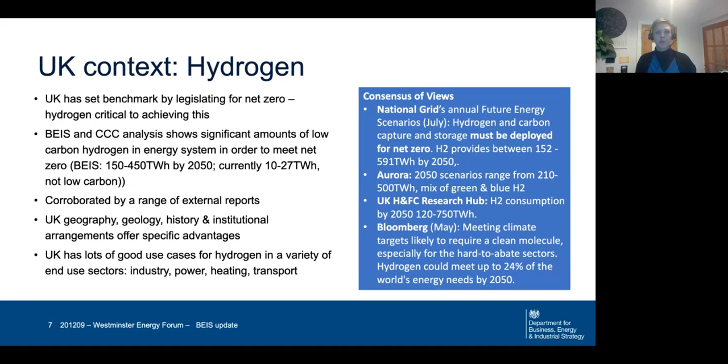Moving on to the next slide. I just wanted to talk about hydrogen in the government's 10-point plan for a green industrial revolution. This, you will have seen, was announced by the Prime Minister in November of last year, I think it was now. And in that, we set out an ambition to work with industry to have 5 gigawatts of low carbon production capacity for use across the economy by 2030.

And we're looking to get to kind of 1 gigawatt by 2025. So that sets out that we are looking for that scale up at this point. We were lucky enough to get some capital co-investment funding of 240 million out to 24-25 for a net zero hydrogen fund. That is for deployment. I'll talk a bit more about some of this later.

It confirmed that we're going to publish the hydrogen strategy. It talked about the need to provide ongoing revenue support for hydrogen production. It talked about moving forward with our hydrogen for heating investigations to villages and towns across the decade, and it confirmed that hydrogen would be a priority area for the Net Zero Innovation Fund.

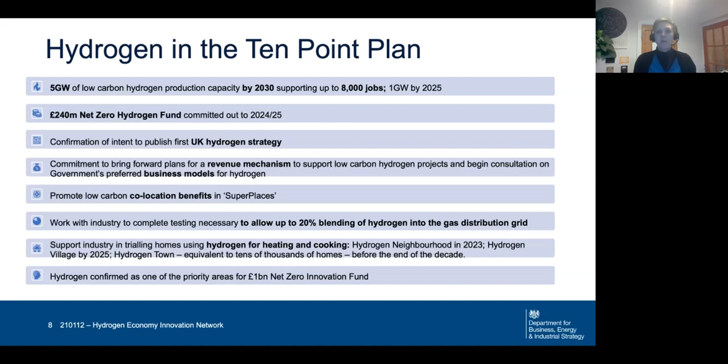Moving on to the next slide. Back in September now, the former Secretary of State, Alok Sharma, committed to publish a UK hydrogen strategy. And we've confirmed that in the 10-point plan and in the energy white paper. That will be a whole system strategy.

It will look at supply through to demand across the whole value chain. It will talk about why hydrogen makes sense in the UK context. We want that to be a whole UK view. We know that in each of the nations, work is ongoing to develop their own hydrogen plans, but we want to be able to showcase the whole of the UK in a UK strategy.

The focus will largely be on the action that's required in the 2020s to meet that 2030 ambition, but we want to be aware of where we need to lay the groundwork for the ramp up beyond 2030, which will need to be pretty steep. One thing we think we have an advantage of is because we are at the early stages of developing the policy and strategy for hydrogen, we can make sure that we're building in a focus on the economic benefits from the very beginning.

We want to be clear on the role of various actors in this, because it's not something that just government can do. Government at all levels needs to be involved. There's a role for the R&D and innovation community, industry, regulators, and a number of different players.

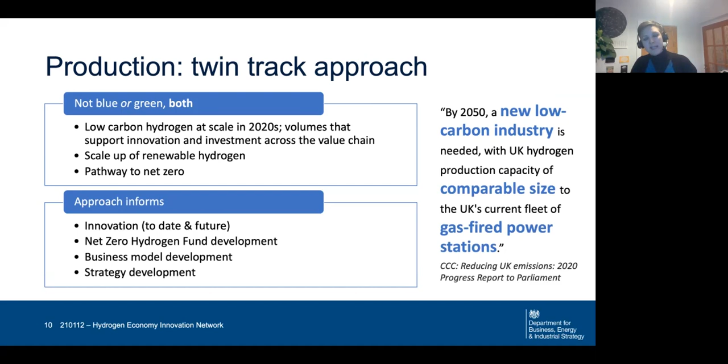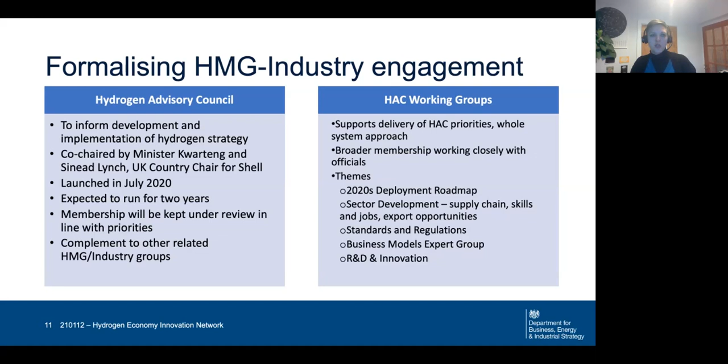There's a CCS infrastructure fund of £1 billion out to 24-25, which will enable some of the blue hydrogen production I was talking about earlier, but also we'll see under the Net Zero Hydrogen Fund the deployment of green hydrogen. Within that as well, the BEIS Net Zero Innovation Fund, successor to the Energy Innovation Fund, has a £1 billion budget, and as confirmed in the 10-point plan, will continue to support hydrogen, with details of the competitions under that fund coming out in the coming weeks and months.

One thing I'm very keen to do with the Hydrogen Advisory Council R&D and Innovation group is get a much better sense of what the funding landscape looks like, so we can support everyone by helping people be aware of the funds available and how they fit together - because sometimes that can be quite complex, what the handoff point is between certain types of funds funding things at certain TRL levels, and where those projects would get picked up later on.

Hopefully that's something we will be able to talk about a bit more in the strategy when that comes out early this year. I can't believe it's this year now.

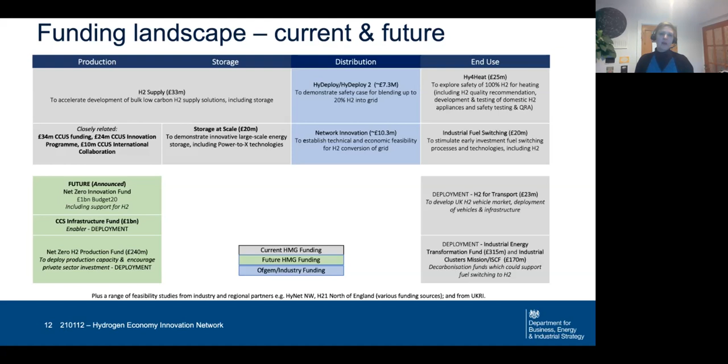Finally, just to talk about next steps. The HAC working groups I mentioned are getting underway. We've got one today on the roadmap to 2030, and the R&D and innovation one, getting that staffed up and in place is certainly a priority. We'll be engaging on the design of the various funds that come out, not just the Net Zero Hydrogen Fund, but we'll be working alongside our innovation colleagues on the priorities for the innovation funding, and also the other deployment funds.

We'll be working on our strategy development ahead of publication, and there'll be a consultation on the hydrogen business models alongside the strategy. So it's going to be an extremely busy few months ahead.

This is my second day back from leave and it already feels extremely busy, but I think that's a signal of just how far we came last year with hydrogen really getting high up on the political agenda. Our Kwasi Kwarteng, who's our new Secretary of State, is a massive supporter of hydrogen, and I know that is shared in number 10 and increasingly in other ministers' portfolios. So that's a really exciting thing to see it being mainstreamed. And now if we can bring all of that together for the hydrogen strategy, hopefully that will set us out on a really good path for the 2020s.

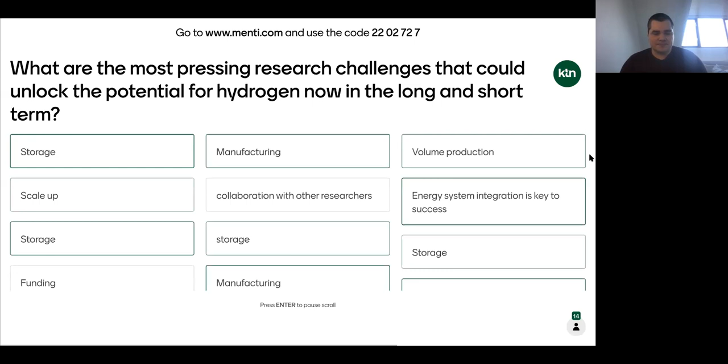Storage is far and away featuring the most highly in those first ones, and scaling. Retrofit's an interesting one, and I know Matt will probably have some things to say about that, when we've got rolling stock or vehicles that might be in service for 20, 30, 40 years. And integration, yeah definitely - I think if words were sized based on the number, storage would be up there at the top.

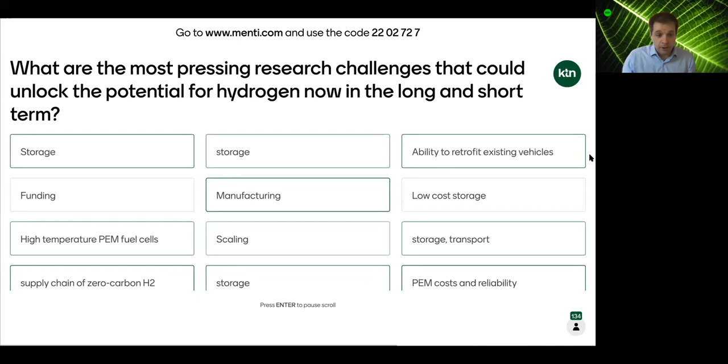Thanks for your participation, this is great. It's always tricky when you've got a live webinar to get everybody involved. Okay, I think we've really got good figures here, really good numbers coming back in, so keep going. If we go to next question please.

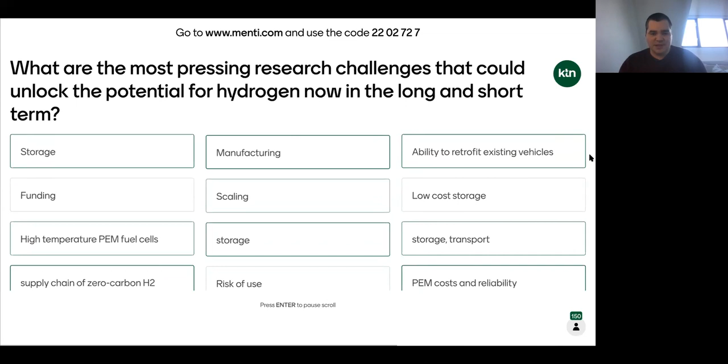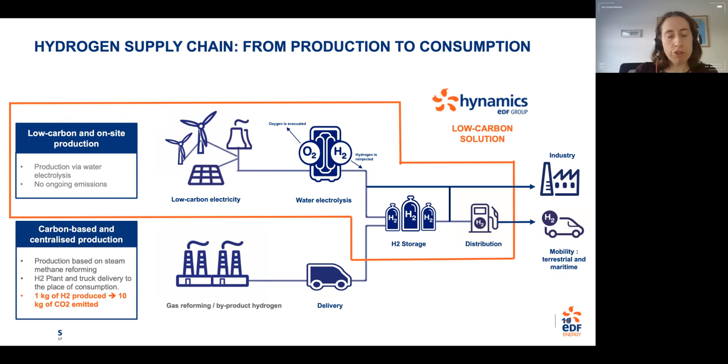So that's my introduction. The main thing I want to talk about today is one specific project that we're doing in my team to support the hydrogen transition, particularly on transport. If you move to the next slide, Steffan - it's called Hy4Fleets. It's a 6-month project funded by Innovate UK.

I don't think it's one of the initiatives that Rita showed on her funding landscape slide, because it was from a funding call on zero emissions vehicles in general rather than a hydrogen specific funding call. So it's 50% funded by Innovate UK and also supported by our nuclear projects. The idea is that we would try to address the gap in technical and economic insights on hydrogen switching by coming up with an assessment tool that will evaluate the operational, economic and environmental performance of a hydrogen fleet - that's either buses or trucks in the real world.

This is building on a tool we've already got that helps fleet managers understand their capability of switching their fleet to electric vehicles, for fleets of small scale vehicles. We thought it would be useful to take that EV switching tool and turn it into a hydrogen switching tool. So the two main deliverables are a feasibility study report, showing how possible it is to come up with these recommendations, and also a prototype tool that we can try for different use cases.

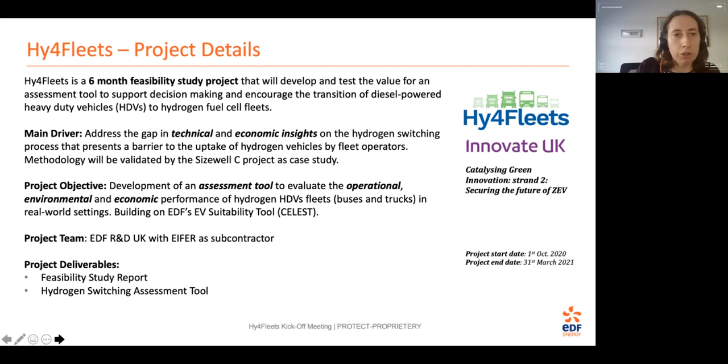So if we move to the next slide, that gives a bit of an overview of what the tool is.

The main inputs are fleet profile information, so what kind of vehicles have you got? Have you got 100 small trucks? Have you got 12 big trucks? What kind of buses have you got? Really high level information about the vehicles. It combines that with GPS data, where it's available, though it's not always available, to try to understand what the general patterns are, what those vehicles do every day.

It then outputs various things, which I'll go into in a little more detail. One is a recommendation on what a suitable hydrogen replacement for your diesel vehicles might be. It gives you some information about what kind of refuelling patterns there would be for those vehicles, and therefore what infrastructure you'd need. It tells you about what your total hydrogen demand would be for switching your fleet to hydrogen, and gives you a little bit of information on the environmental impact of that switch, and also the total cost of ownership.

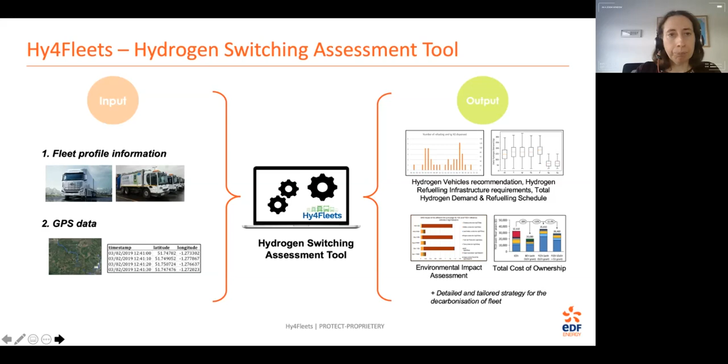If you move to the next slide - I'm not going to go through that equation in too much detail, but this is broadly what it does to calculate the energy consumption profile. It starts off with some information about a vehicle and about the impact of driving patterns on the consumption of that vehicle. As we all know, you consume more fuel if you're stopping and starting a lot, or going at different speeds. So by using GPS data, it tells you what your consumption would be.

It obviously combines that with different vehicle types - what are the characteristics of the vehicles we're using? Then, as I said, it takes the reference driving cycle, which will either come from GPS data where that's available, or if it's not available for whatever reason, we can make some assumptions or estimates. So what that tells us is, for the bus or the HGV we're looking at, the estimates of the hydrogen fuel mileage that bus or truck would need.

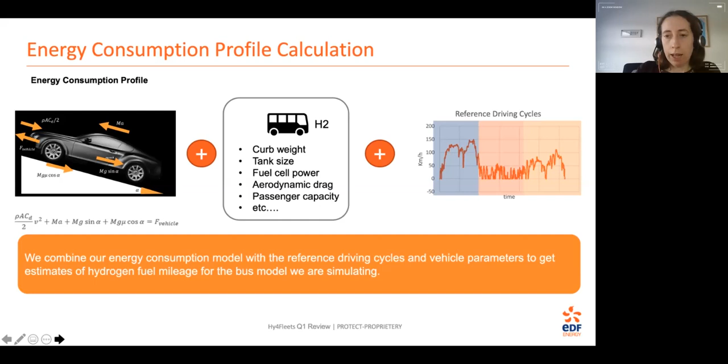And if you move to the next slide - so this is some of the outputs of the model. The first graph at the top left shows a fairly typical amount of hydrogen in the tank graph. As you see, you refuel at the beginning of the day in this case, and then it gradually runs down and then it refuels. That's fairly self-explanatory.

And then we also aggregate that up into daily, hourly or monthly views, and it shows you what your overall fleet patterns are. The main use case we've got for this so far is the construction project at Hinkley Point C, a very, very large construction project for a new nuclear station. The graph at the bottom left is for the bus fleet there - there's so many people on site, it's a pretty sizeable bus fleet - you get those peaks at the beginning of the day and the end of the day at the shift handovers at 7.

The reason we're using Hinkley Point C for our main use case is that we want to use this tool to understand - one of the main use cases will be if EDF gets permission to build a replica of Hinkley Point C at Sizewell C, we want to make that a low carbon construction site. So by using the data from the Hinkley site, which is already underway, we want to see whether we can use hydrogen to fuel a lot of the buses and HGVs at Sizewell C.

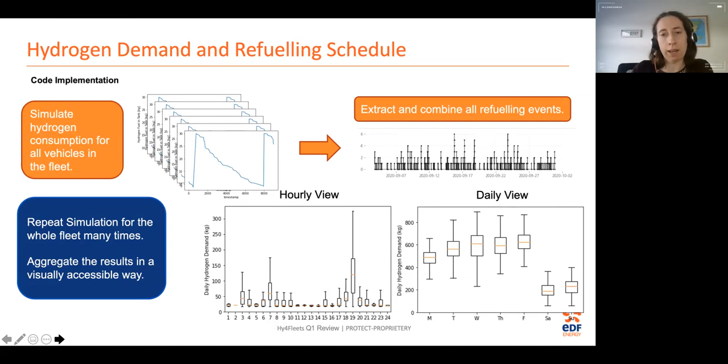So the idea is we repeat this across the fleet and come up with a good indication of what the patterns are across the fleet.

On the environmental impact, this shows it breaks down the environmental impact of your fleet, comparing a hydrogen bus to a diesel bus or an HGV. The important point here is that it includes both the vehicle production, which is the orange blob, along with the ongoing emissions through the operation of the vehicle. As you'd expect, diesel vehicles produce a lot more emissions than hydrogen vehicles, which is no surprise to anybody. At production, there are slightly higher emissions through the build, the capex, the upfront building of the vehicles for hydrogen vehicles than ICE.

But it's important to note that this is a relatively new technology, so we shouldn't necessarily assume that will be the case forever. The reason there's still some blue in the hydrogen is that we're being pretty conservative in what the emissions involved with the production of the hydrogen is. The graph on the right, which I won't go through since we're already over time, breaks down the upfront emissions into different parts of the production of the vehicle.

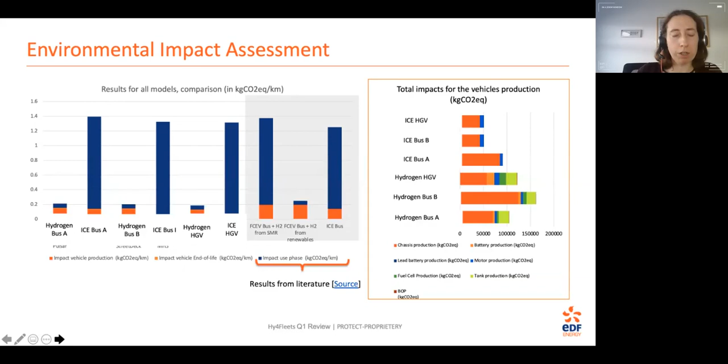And then finally, if I move to the total cost of ownership - sorry, it's not on there, but that's the main thing I wanted to cover today. I don't know whether we've got any time for questions, but my details will be available if anyone wants to discuss this further. We've got a few use cases, but we're really always interested in working with other fleet managers who'd be interested in applying this to their fleet as a kind of partnership.

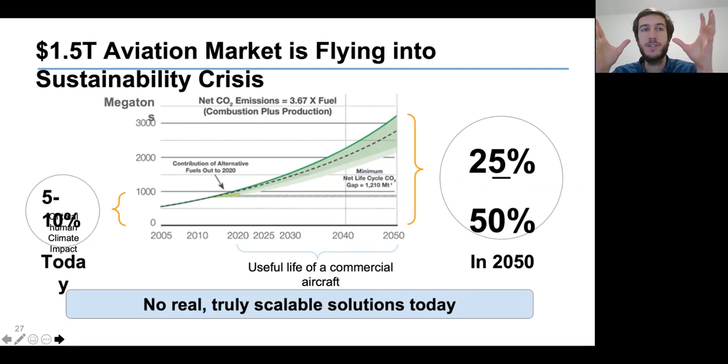And they are also not really scalable. That leads to a problem, because aviation today has a climate impact of somewhere between 5 to 10% of the total human climate impact. People see that rising to something like 25 to 50% by 2050, which leads to the question: does aviation still have a future? Is there a social license to actually operate? We, of course, think there needs to be a solution, and we think we're developing that one. The vision we have, if you move to the next slide, is renewably powered hydrogen electric aviation.

What you see here is essentially the ecosystem that we are developing, leading towards a long range, lower cost and zero emission solution. And what is really important, coming back to my first point about being practical, is we cannot do everything in this picture. What we focus on at ZeroAvia is developing the propulsion system solution.

So everything you see on the right-hand side inside the wing of the aircraft, from onboard storage of hydrogen on the aircraft, putting that into a fuel cell, combining that with oxygen from the air, turning it into electricity, and then spinning electric motors that in turn spin a propeller, a fan, whatever you want to spin, depending on the size of the aircraft.

Of course, all that is only a zero emission solution if you produce the hydrogen in a zero emission manner. And that's again where we think aviation is a particularly interesting use case, because aviation is an incredibly large user of hydrogen, potentially, with every single vehicle.

And every single vehicle operates a long time throughout the day, because essentially every moment that the airplane does not fly, is not in the air, does not bring money to airlines. So airlines really stress utilization of the aircraft. And each single flight, even on a 20-seat aircraft, which is really the very, very small end, already consumes something like 100 kilos of hydrogen.

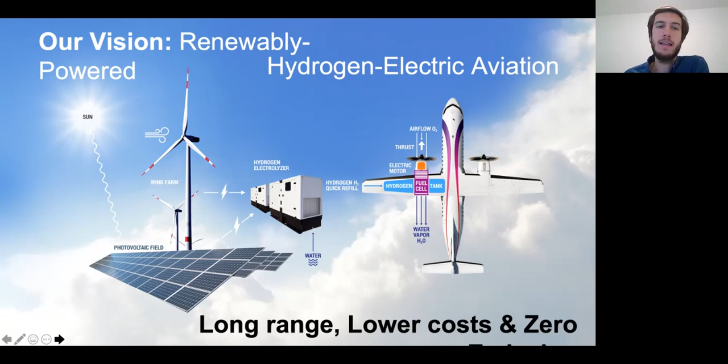Now, let's think about what we actually need to do to get there. One of the most interesting things that we have seen, especially over the last 6, 7, 8 months, is really a lot of the momentum accelerating. So I think what we can say by now, justly, is that hydrogen is really considered the fuel of choice if you really want to decarbonize aviation.

It started about a year ago in May 2020 with that study that the Hydrogen Fuel Cell Joint Undertaking conducted together with McKinsey and Clean Sky, that talked about the potential of hydrogen in aviation. Continued with Airbus announcing hydrogen-powered aircraft concepts in September last year. And by now, there were even total covers of one of the most popular aviation industry magazines that you see on the right, that actually promoted hydrogen in the industry.

But of course, as a startup, we believe there is really only one way of doing this in a more meaningful way. That means you have to actually show some steps on this journey already now, and not only talk about 2035 as Airbus does. We need to have a credible plan on how to scale from what we can do today to something the size of what Airbus is showing here. And lastly, we need to build the support system and the ecosystem around it.

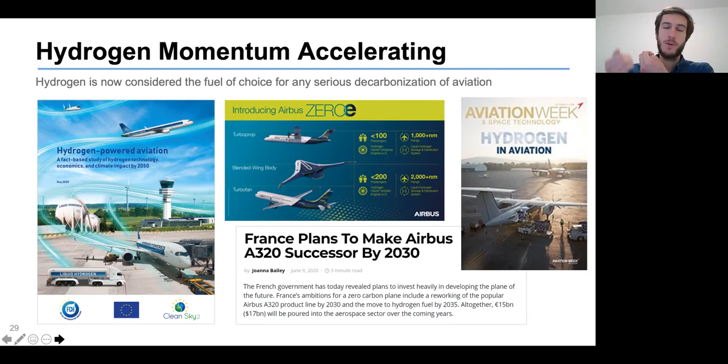Now let's walk through each of these 3 stages. We think if you want to be really practical about decarbonizing aviation, you need to show people what it actually means. And so that is why our first step was flying the 6-seat aircraft out of Cranfield in September last year. That is the largest hydrogen electric aircraft in the world, and it is flying constantly since then.

We're just kicking off another phase of flight testing now towards the end of this month, and then will in February conduct long distance flying as well, including the first A to B hydrogen electric flights ever. So watch out in the skies around Cranfield if you live anywhere close, that will be coming up very shortly.

And that is really exciting, right? It shows people what's possible.

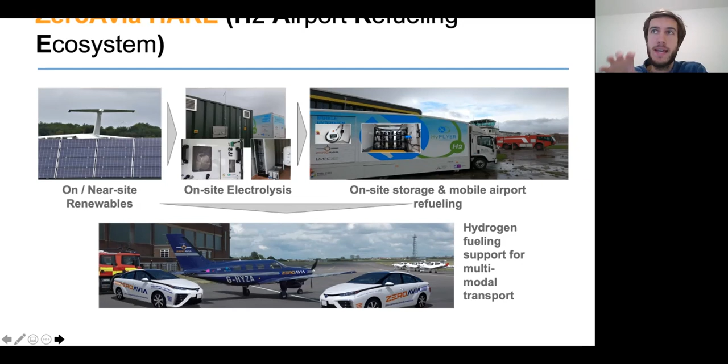Now let's have a quick look at what we're doing next. If you could go to the next slide.

What we're doing next is we're moving from the 6-seater to actually our first commercial offering, which will be in the 9 to 19 seat category, or 10 to 20 seat category, covering 500-mile range, which is about 50% of trips worldwide. We just announced at the end of December funding from the UK government as part of the ATI program to support that development, to support the R&D for the 19-seater. You will see that 19-seater flying by the end of this year, and by 2023 we expect to have it commercially available, certified on the market for you to actually have your first zero emission flights. So that's really something we're looking forward to.

The great thing with hydrogen though is that it does not end with a 19-seater. It can actually then scale to the regional turboprops that you see here with 2027. It can even scale to the small narrow body markets like the A320, which you've seen announced by Airbus as well, in the 2030, 2035 timeline.

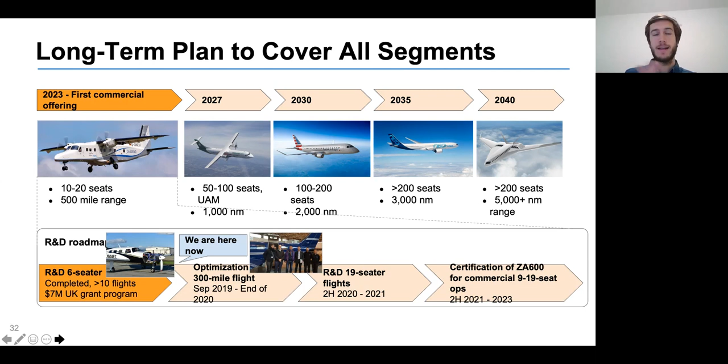And that is really important as well, right? Because we always talk about, you know, the supply chain needs to develop, we need to get the hydrogen ecosystem ready, but we also need to bring capital into the sector. With these kind of backers now, there is actually a road for us to certify those systems, to get them out in the market, and to build out supply chain on all sides that we need to do.

And of course, one of the backers that we do have, and that's my final slide, is the UK government, through the HyFlyer 1 program, through the HyFlyer 2 program, and sitting on the Jet Zero Council. Of course, the ambition is to have a zero emission jet by 2030, and that's what we are really striving towards.

Just want to say thank you again, and look forward to any questions you are having in a few minutes. Hopefully we have some time for that.

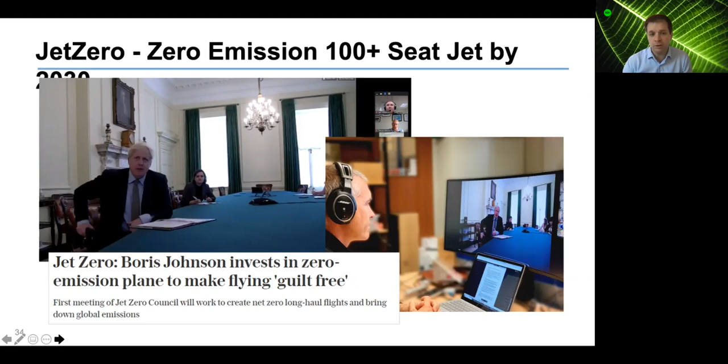Great, thank you for the opportunity. It's great to be here. I'll try and fly through these slides. My name is Matt Candy. I'd like to introduce you to Steamology.

Next slide please. We are a 10-person startup. We're pre-revenue. We've got our own CAD, CNC, CFD, and test facilities, all based near Salisbury.

Next slide please. And this led to thinking about how to do it better. At the core of everything we do at Steamology is the combustion of hydrogen and oxygen. And if you burn hydrogen and oxygen, you only get hot steam. You get no NOx, no SOx, no CO2, no particulate. The only byproduct of combustion is water, so you can transform water into power.

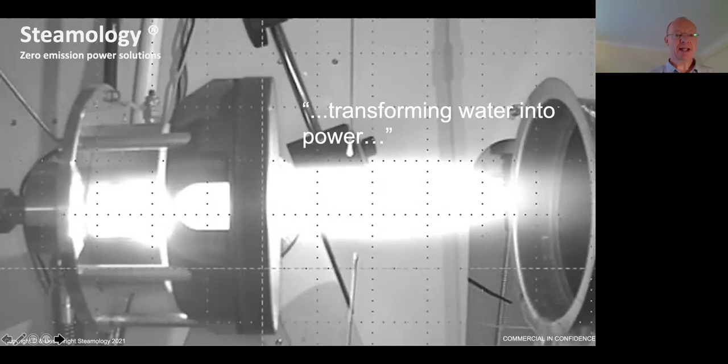In 2014, the journey started to build a faster car, and very sadly, the sponsor of the project was killed in a helicopter accident in 2018. There's an expression: if you want to make a small fortune in land speed, you should start with a large one. So next slide, please, we needed to look for commercial applications.

And the overall picture for our water-to-water cycle is that we know that renewable energy is abundant.

10,000 times more sun hits the world every day than we use. It's just in the wrong place at the wrong time. So we can use renewables to power electrolysis and create hydrogen and oxygen gas. By storing the gas, it's the battery of our system. When the sun has gone down or the wind stops blowing, we can burn the gas, create steam, and drive a turbine to make electricity, returning the water back round to the electrolysis process. So we've got an overall effective energy cycle.

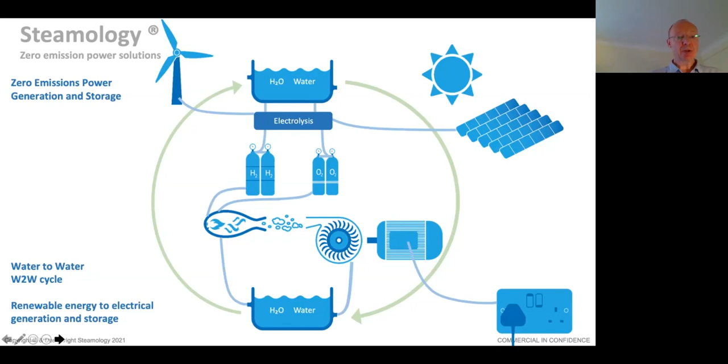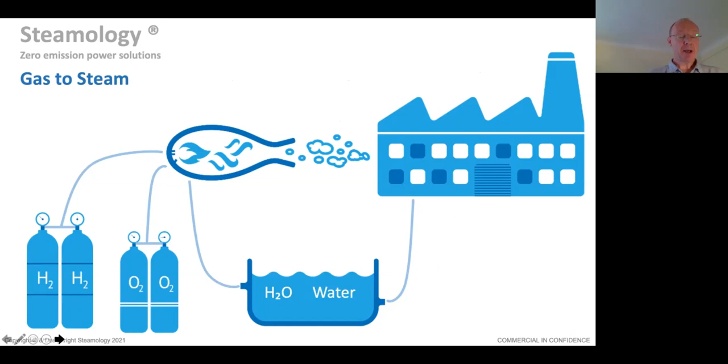We've got three major product groups sharing common technology. The first is gas to steam. We can take stored gas and quickly, within seconds, make a high quality and high quantity of steam. We're exploring pure steam for pharmaceutical processes, industrial steam from distilleries through to tea plantations. We can also create high temperature saturated steam for thermal oil circuits through a heat exchanger for the chemical industry looking to reduce their Scope 1 emissions. So that's the first product group.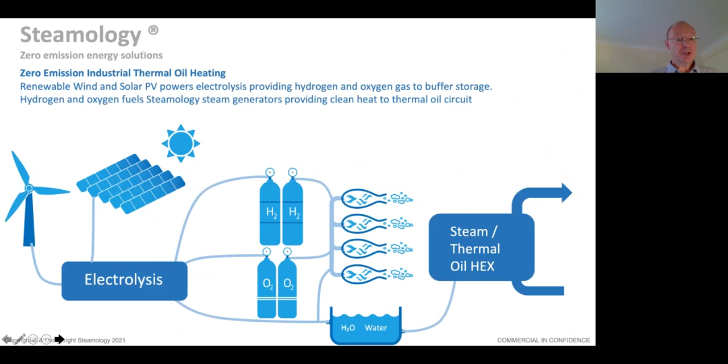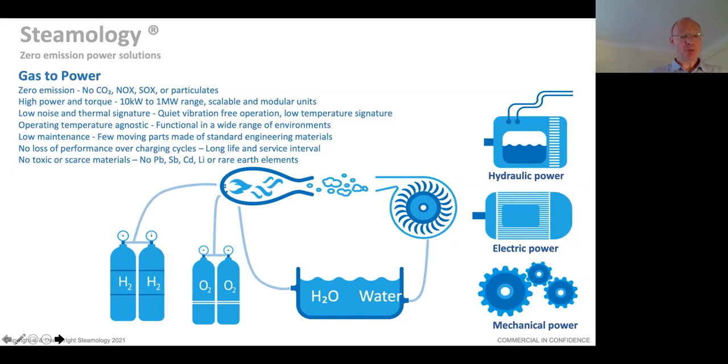The next one is gas to power. We brew our steam typically at 40 bar, 400 degrees C for this application. 40 bar is chosen because you can hold it in standard materials, and at 400 degrees C we use a lot of aluminium. So we're not using fancy exotic materials or processes. We want a cradle to cradle approach, full recyclability, kind to water, no toxic materials. We can make scalable, quiet, zero emission turbines to output mechanical, electrical, or hydraulic power.

This has led us, particularly in high power applications, to explore rail and marine, where the decarbonisation agenda is very strong. But we're also keen to look at heavy haulage and construction, as well as static power. We can come into power and off power very quickly. So in a ULEZ zone, we could provide charging for vehicles or loads for hotels, data centers, this sort of thing.

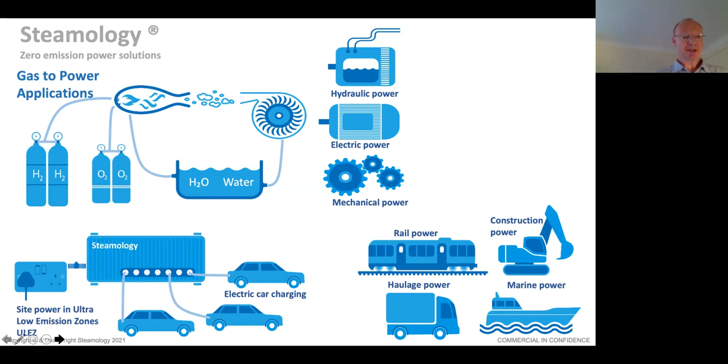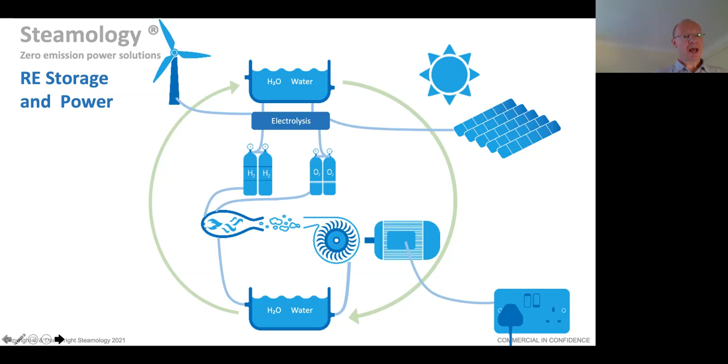The third product group is renewable energy storage and power. This is combining our activities, and we're looking to partner with electrolysis experts, gas compression and storage to develop storage and power projects. So that's an overview of our three product groups and the projects we've got.

We're working with Strathmore University in Nairobi, Kenya, to develop an off-grid storage and generation facility. We're also developing for microgrids in a 20-foot ISO container, electrolysis, gas storage and compression, and electrical generation. This is a pilot project that will be deployed later this year.

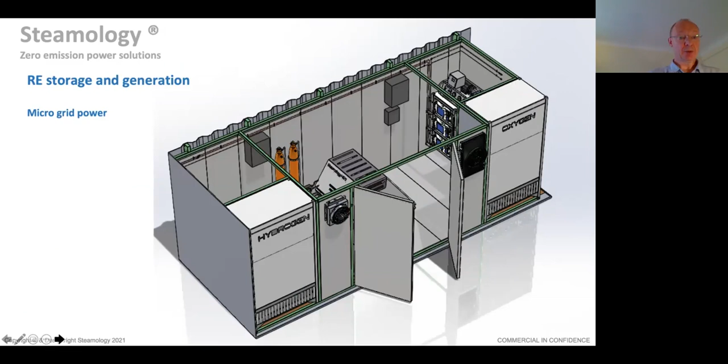In the rail industry, we've got a number of approaches, and the first one we did last year in 2019 was a 100 kilowatt range extender. This allowed us to explore the idea of taking gas in and creating 750 volt DC for the traction motors or for the batteries. Working with Viva Rail, who are retractioning the old London Underground District Line stock, this is a flexible power module.

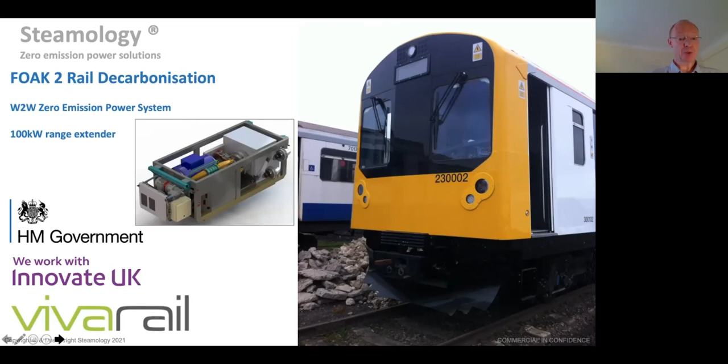We have an advantage at about 250, 300 kilowatts. We occupy the same space as a diesel engine. And so we've got, whether it's a mechanical output or electromechanical output.

What becomes interesting is that with batteries and fuel cells, it's very linear. Every time you add 100 kilowatts, you add a block and a balance of plant, whereas we just add more steam generators to the same turbine. So we have an energy density at higher power output, which is where we feel we have more of an advantage. And we can use a wide range of fuel purities, which gives us an advantage. The space liberated allows us to store the oxygen that we also need.

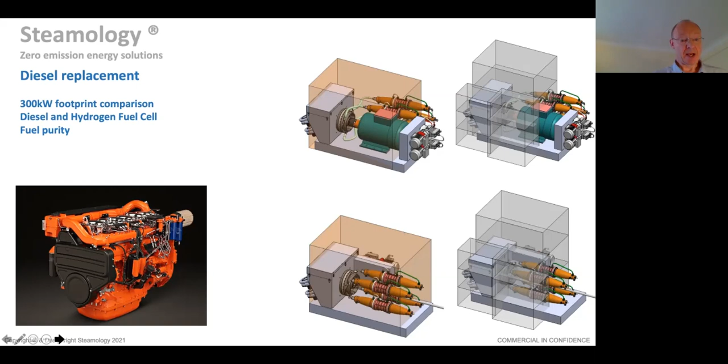We're also looking at high power applications in steam electric. So we have a low carbon rail freight project where we're doing a 600 kilowatt turbine for demonstration at the end of March. This will power a permanent magnet motor and supply electricity for traction motors to retraction existing rail freight or be part of full power or bi-mode power on new rolling stock.

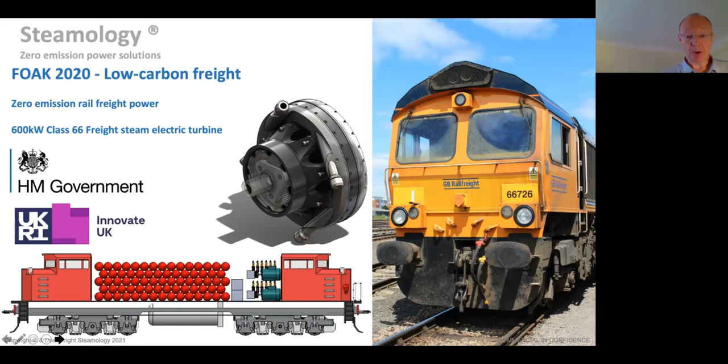With the freight, you've got 74 foot, 125 tons, 14.5 tons of diesel to come out. So we're looking at the implications of retractioning the whole kit.

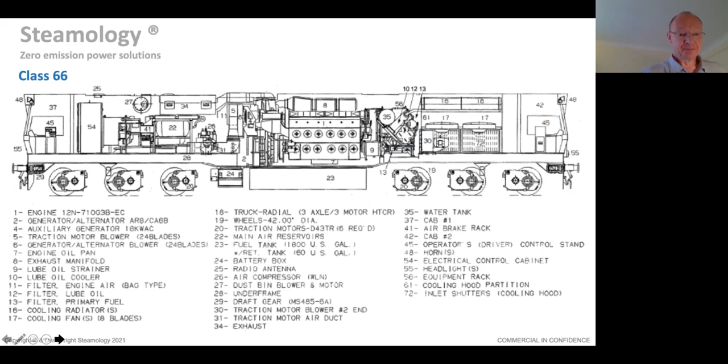This is allowing us to develop the steam generators. The steam generators have no moving parts. You get to steam in seconds. So we've got the torque response, the throttle response required for simulating a diesel. And it's very spanner friendly for maintenance.

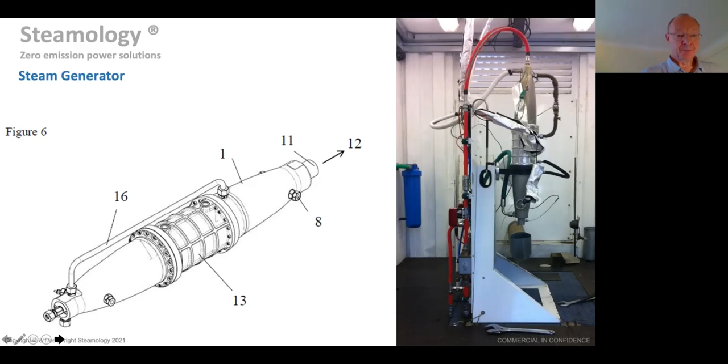We've got a very simple turbine reduction gearbox. It's mechanical. The turbine spins at 9,000 RPM, and we can come down to generator or diesel gearbox speeds. So it's a very simple, long life, fully recyclable approach.

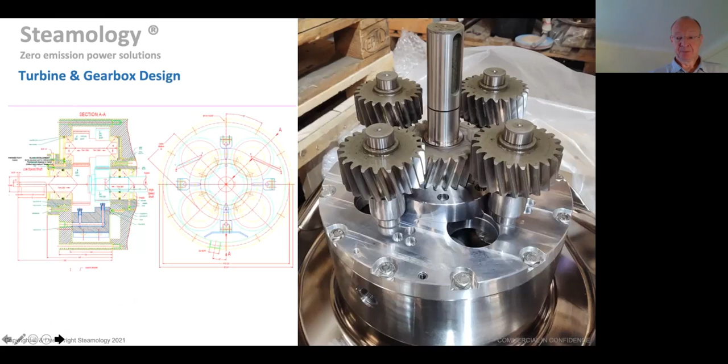Towards the end of March, you're very welcome to come and see us demonstrating on the dynamometer. We're in build, and we'll be doing a public demonstration of the 600 kilowatt turbine running through this kit.

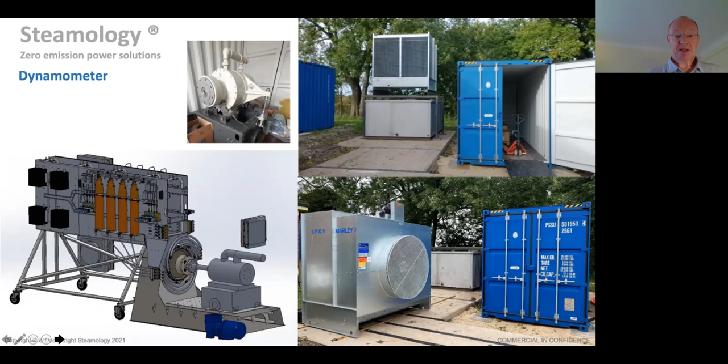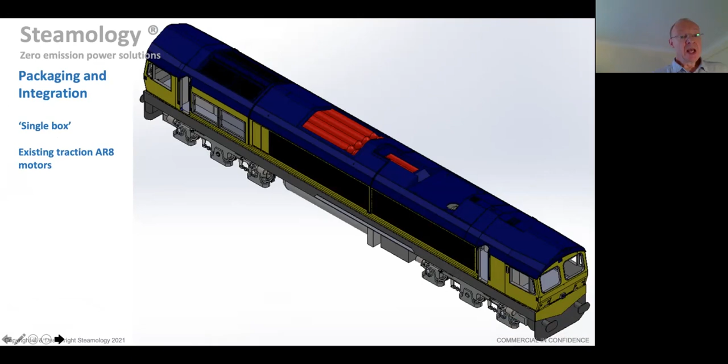Energy density is always a problem. With freight trains, battery and fuel cell solutions often require a tender, which takes up weight, length, space, charging time. So we're looking at a single box solution. We can get about 13 megawatt hours of useful power in a freight format, which compares to about 20 megawatt hours that you might find in a diesel. So we're not there, but we're getting close.

Interestingly, we can do direct drive as well. This is a live project where we've got a turbine going through a traditional ZF EcoWorld box.

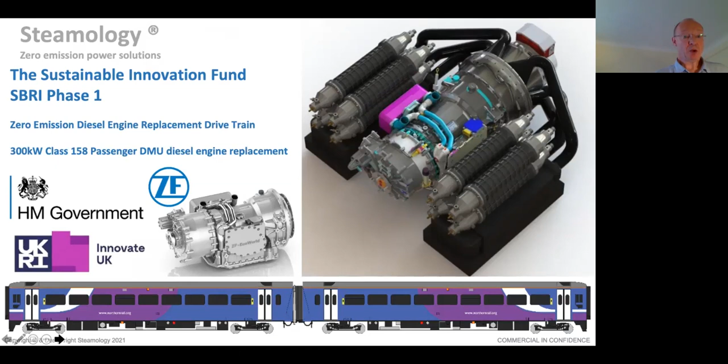This is retractioning a traditional DMU. There are 3,700 DMUs on the network, with diesels banned by 2035 in Scotland and 2040 in the UK. These have to come off, no diesels on the UK network after that. So we're looking at unbolting the diesel and putting our solution on as a power solution for that. This shows that we can get the range and the power, and we can do it all under the floor.

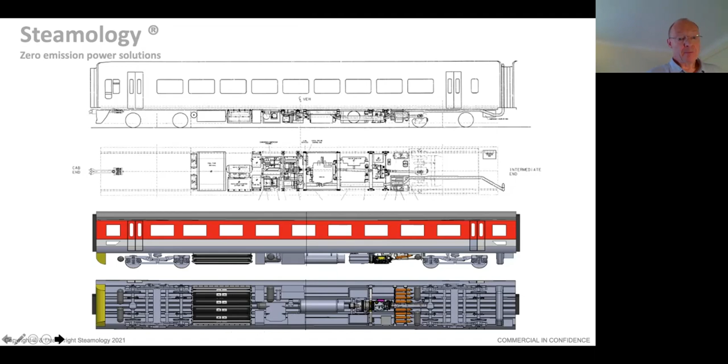This power unit, we're very interested to engage with the wider community. This is a 300 kilowatt power unit. It's flexible, it's a closed cycle, and it can use a wide variety of fuel purities. So we can look at heavy haulage, construction and marine as wider markets for this. We really welcome a wider conversation.

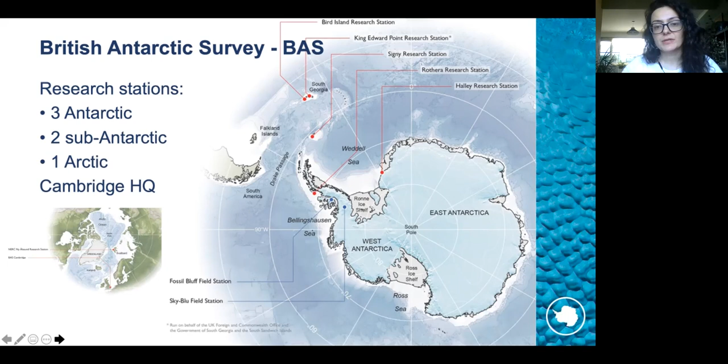Simon, next slide please. Thank you. So we operate on the coldest, windiest, driest, highest place on Earth. We have 3 stations in Antarctica, 2 stations in the subantarctic islands of South Georgia, 1 in the Arctic, and our headquarters in Cambridge.

Next slide, please. So how do we get there? We have our ships, so we operate our ships at the moment, the James Clark Ross, which is soon to be replaced by our new research vessel, the Sir David Attenborough. We use the ships to transfer people - scientists, science support staff, their equipment, food, fuel, and everything we need to operate a station in Antarctica and to deliver our science. The ships are also doing science cruises as well.

We usually fly to the gateways of Antarctica - the tip of South America, the Falkland Islands, and Cape Town in Africa. And then from there, we use our own aircraft or ship to reach the stations. We also have a fleet of aircraft, 5 aircraft, that help us not only get to Antarctica, but also go deep into the field to support our science delivery. Now, as you see, the operation of ships and aircraft is basically the largest part of our carbon footprint and very difficult areas to decarbonize.

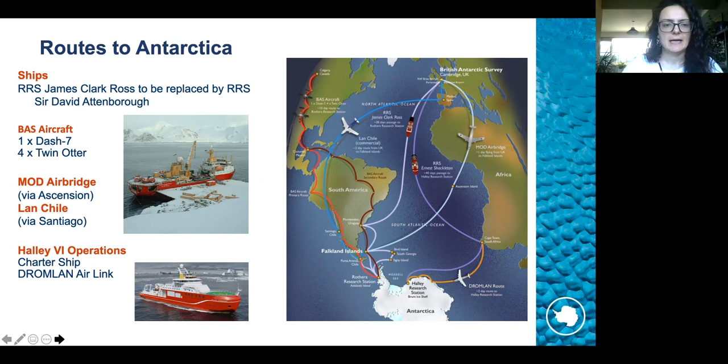BAS is committed to achieve net zero carbon emissions by 2040. This is looking at our own operations, but also some high impact measurable scope 3 emissions. It's worth mentioning that the British Antarctic Survey is part of the Natural Environment Research Council, which is part of UK Research and Innovation. So we are fully aligned with the environmental sustainability strategy of UKRI, and also the aspirations of NERC.

Most importantly for us as an environmental organization and climate expert organization is to contribute to the global efforts of climate change mitigation. Our focus areas are our directly managed activities, the ones we have full control of - our infrastructure, our estate, our ships and aircraft. But we are also looking at our outsourced activities, which we have indirect control of through financial decisions, such as procurement and all of the contracted activities. And then wider investments and research collaborations where we can have indirect influence on the activities of others.

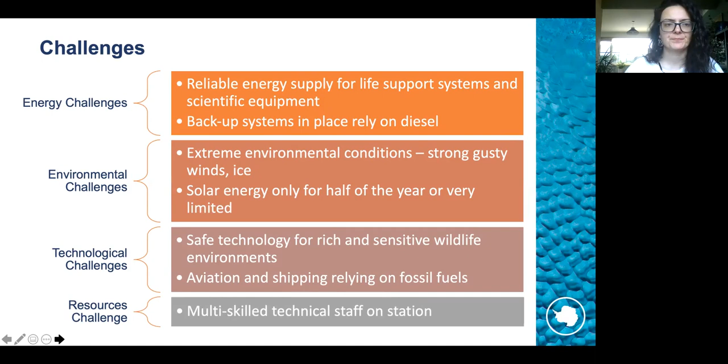As an example for the KTN Innovation Exchange challenges that we ran in November, the first challenge was how can we decarbonize the energy supply of such remote places? And the second one was how can we decarbonize the fuel system for polar vehicles in remote logistic facilities?

We received quite interesting technological solutions as proposals. A lot of them are going to inform our decarbonization strategy for these areas and help us reach our targets in the future. To mention a few: combined heat and power with vertical axis wind turbines, alternative fuels, tidal power, heat generation from wind energy, seawater heat pumps. These are going to inform the decision making for our decarbonization strategy for these areas.

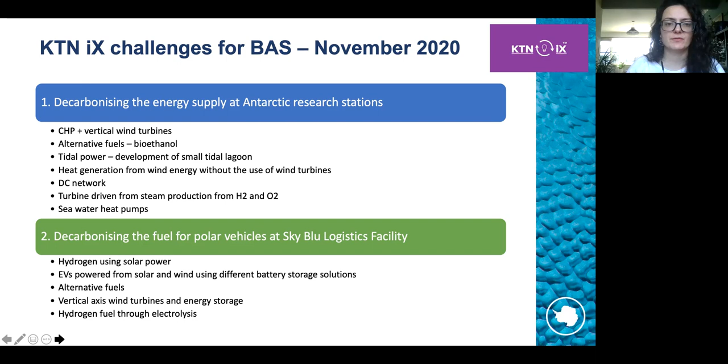And hydrogen can actually be a solution to our biggest decarbonization challenges. It does present great opportunities, especially for hard to decarbonize sectors such as long-haul transport, heavy industry, and also for long-term energy storage.

Some of the challenges have already been mentioned, such as storage and high costs, and the need for a robust regulatory framework. But as an environmental organization, I would like to mention that we also need to understand the environmental impact of using hydrogen in large-scale applications, so that we don't create new environmental challenges in an effort to solve the existing ones. Rebecca has touched on the environmental impact of using hydrogen in vehicles, but we need to see the larger picture in all areas that we're planning to use hydrogen as a technology.

But for BAS, for the British Antarctic Survey, hydrogen could be an important game changer. As I mentioned, we're having a new ship, the Sir David Attenborough, and we also operate a fleet of aircraft. So using hydrogen in shipping and aviation could be an important change and an important factor to decarbonize these areas. But also looking at the energy provision of some of the remote stations that we have in Antarctica, where conventional renewable energy systems are not feasible or present a lot of challenges.

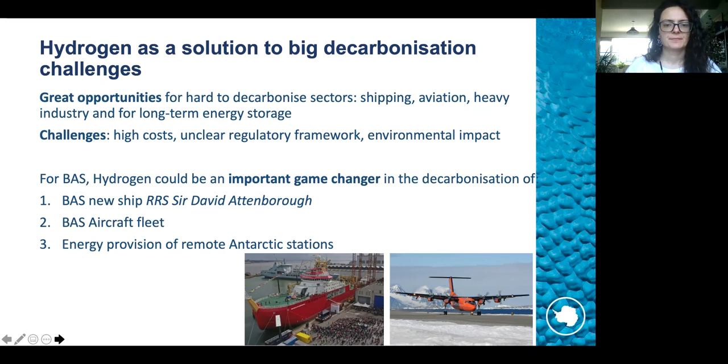And that will be all for me. Thank you very much.

That's great. Thank you, Nopi. I think everyone will agree that that was a really interesting, different angle, different viewpoint to look at from hydrogen. Thank you very much.

Okay, so that's all from our speakers that were able to join us. I hope you found that really interesting, great to hear about the work that's going on and sharing the unique challenges that everybody's presented with. I'm just going to explain quickly about what the Innovation Network's all about, really, and frankly, why you ought to get involved. So next slide, please, Simon.

To be honest, I'm hoping that everything that's gone before me has presented the context, really. But just a reminder that, as Rita said right at the start, it's a hot topic at the moment. These sources are from the Climate Change Committee, featuring in their 6th carbon budget and also in the energy white paper recently.

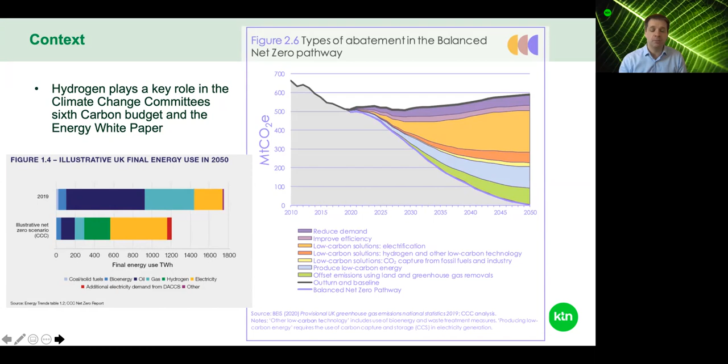I think the point is, whatever scenario going forwards, hydrogen is seen as playing a key role. Next slide, please.

Quite simply across most sectors, which we're going to come on to, and it's influenced our thought as to what role the network can play. I think the point is that pretty much any sector you look at, hydrogen will play a key part in. Not the only part, so we're not in any way saying it's the only solution, it's not, but it'll definitely be part of that balanced net zero pathway as the CCC talk about.

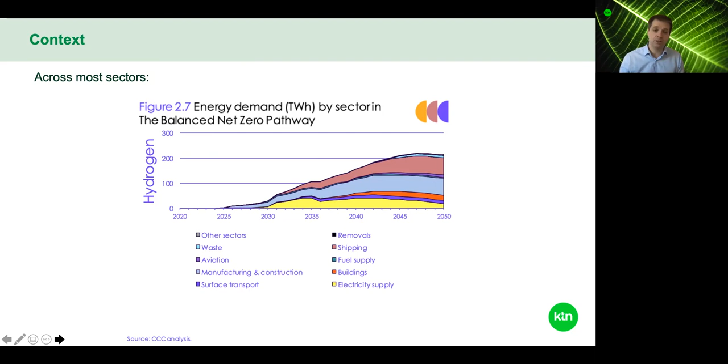Okay, next slide, please, Simon. And we've heard already about the 10-point plan from Rita and a couple of our other speakers. We all knew hydrogen would feature on that, but I think the point that it was number 2, it was right up there, shows how important it is on the ministerial table, and in transport as well.

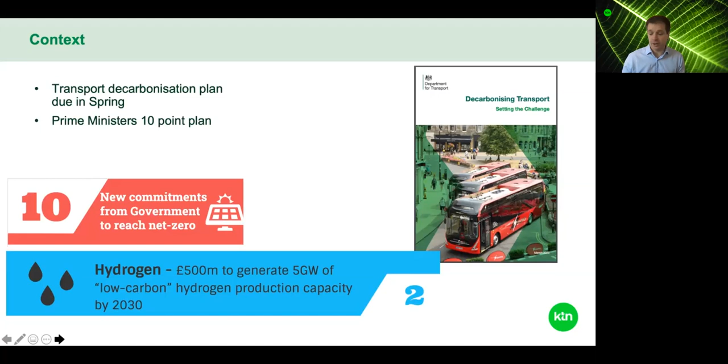So, things going forwards as well, there's lots coming out this year that will feature this. Rita alluded to a few things from BEIS, but from DFT, I think the transport decarbonisation plans put back to spring, but it's widely acknowledged that hydrogen will feature strongly as part of that. So yeah, next slide, please, Simon.

So hydrogen's key, it's a hot topic at the moment. We've peaked at about 400 people online today, who probably want to know a lot about what Rita and BEIS are planning going forward. There's a huge amount of interest in this hot topic we talk about. However, I'm sure we're all agreed that the landscape is very complex, so there's lots of work going on, whether that's government, UKRI, or private sector.

Rita's talked about the advisory council, which seems a while ago now - that kicked off in the summer last year. What we want to do is make sure this network adds value through a combination of discussions, including a very small pre-launch workshop we had with about 15 people in mid-November.

I think what we heard was echoed by what we've heard today, which is that BEIS and Innovate UK are doing a lot around the production side - whether that's getting the scale and volume out there, or moving forward into green or clean hydrogen. But as we've spoken to a lot of people, be those end users or organizations like the Scottish Hydrogen and Fuel Cell Association, UK Hydrogen Fuel Cell Association, and HyCymru, there's this chicken and egg about production or end use need.

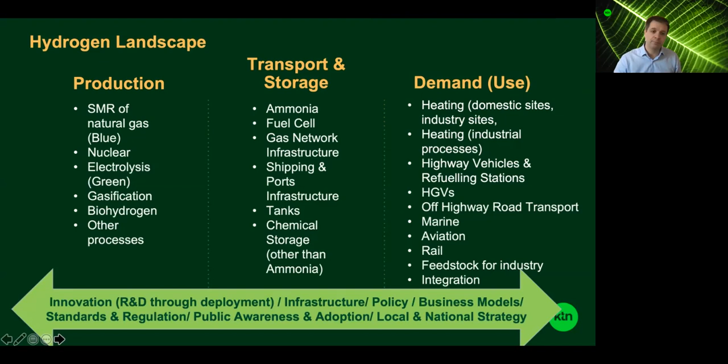Okay, on to the next one please, Simon. So I think, just in a slide, without reading it word for word, the key here, the purpose of the network, is this: what we want to do is help validate views on the challenges to enabling clean, local hydrogen uptake, and finding innovative solutions to those challenges.

So as I said, we've got this Innovate UK funding which takes us right through into next year, so 2022. Rita said earlier on, it's quite interesting about how we need the volume, and some of that might be blue, some of that might be green. I think we want to make sure we've got the ability and capacity to match that with clean hydrogen uptake and use with the end users.

Okay, next slide please, Simon. And so I suppose there's lots planned, but there's three key things we aim to focus on, and we've discussed this a lot with people like Innovate UK, Harsh Prashad and Rita's team in BEIS, and this workshop we had back in November. So I think firstly it's just capability.

So for new entrants into this sector, what are the UK's strengths? What does the capability look like? KTN have a landscape capability mapping way of doing that, so that'll be one of the first things we kick off with.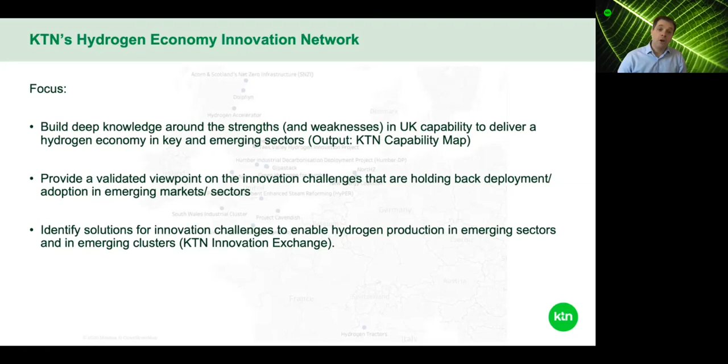So why sign up? Flick us on, thank you Simon. Again, we could put a lot on here, but the key point that's come through in some of the questions today is what we want to do is help in understanding the landscape. As you've heard, based on people signed up today, we had close to 600 people - 560 I think signed up - so all of those people will be brought on board into the network. We've got those powerful connections, we'll make sure we use a newsletter bi-monthly, and crucially, we've heard Rita talk about funding streams - there's probably some other stuff in the pipeline with Innovate.

We'll make sure we keep people up to date on those relevant funding streams through the newsletter and other comms. And I think what KTN's really strong on is regional activity, so we want to make sure we're close to SMEs and projects and case studies happening across UK regions. We'll make sure our members are kept up to date on that.

We've mentioned the capability map, so if you sign up you'll get sight of that. And I'm not trying to do the KTN sales pitch, but as you saw right at the start with the video, KTN are very wide-reaching, so come on board with us, and we will support you in whatever way we can.